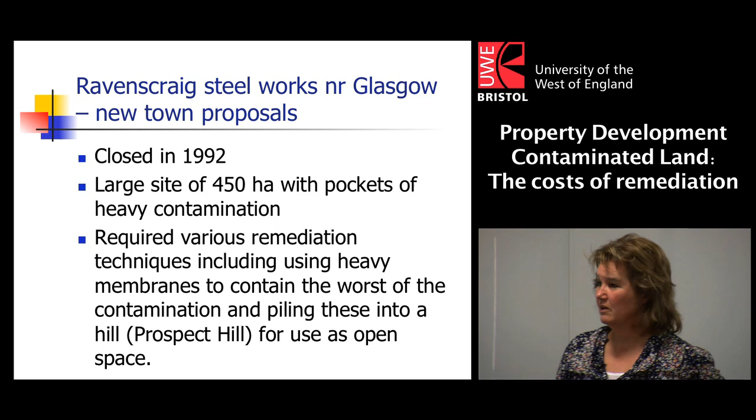an open space. So if we look at the master plan for this new town which they're proposing at Ravenscraig, you can see all sorts of different uses there: schools, housing, town centre, college and so on. You can guess that this is Prospect Hill here, and that is made up of several thousand large plastic bags, probably about the quarter of the size of this room, piled up with the most serious contaminants within it. And protected as open space. That will not be built on.

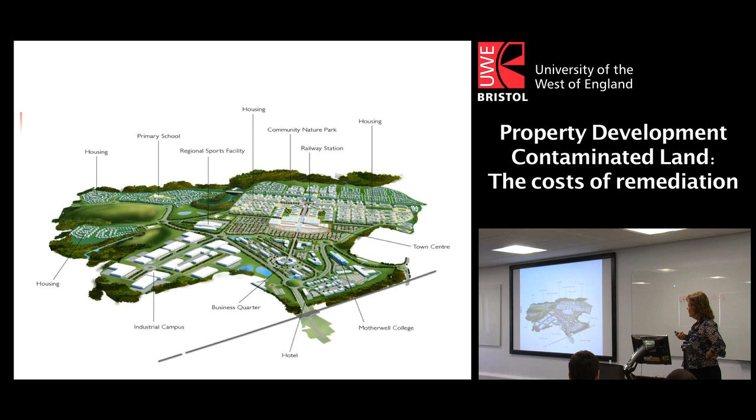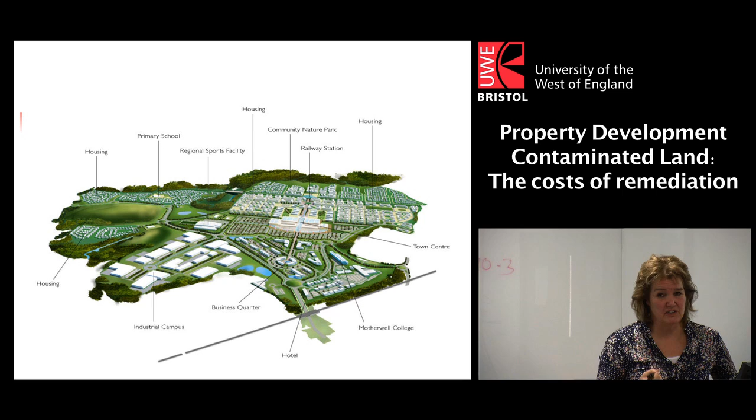That's become a landscape feature on the site, and was seen as a less expensive way of cleaning up that land rather than dig and dump or any other of those remediation techniques we looked at. So that's quite an innovative idea, isn't it? Keep it on site, bag it up, seal the bags so that they can't leak into the surrounding watercourses or the surrounding soil, and use it as a landscape feature. So you don't have the risk of building on top of it as you did at Bryn Mawr.

Cost of that was round about £24 million to remediate that site. Again, heavy subsidy, because this is an area now of severe high unemployment and social deprivation. They've been trying to regenerate this site since the mid-90s, and I think they've now started on some of these housing areas over here as the first phase of it. And of course, not the best timing for a major regeneration project in what's essentially a fairly low demand area. But that's an interesting example of a rather innovative approach to remediation.

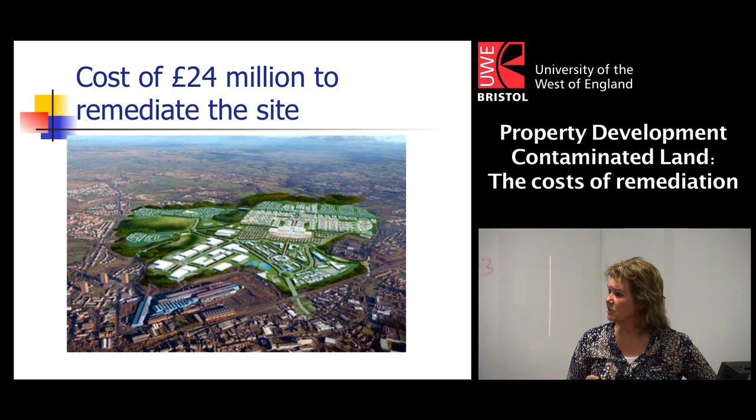And the third example I want to show you is of Wimpey Homes in North Cardiff, who wisely or unwisely, you might have your own views on this, swapped a piece of land with another house builder in Cardiff, and it was a proposal for 32 new houses, but it was poor ground. It was not a very good subsoil, and the necessity was to create sufficient foundations for these houses that they had to pile the foundations to an average depth of 18 metres. Now, that's pretty deep piling, isn't it? In fact, that's very deep piling, and it's very expensive to do. But that was the only way they could provide safe foundations for these new homes.

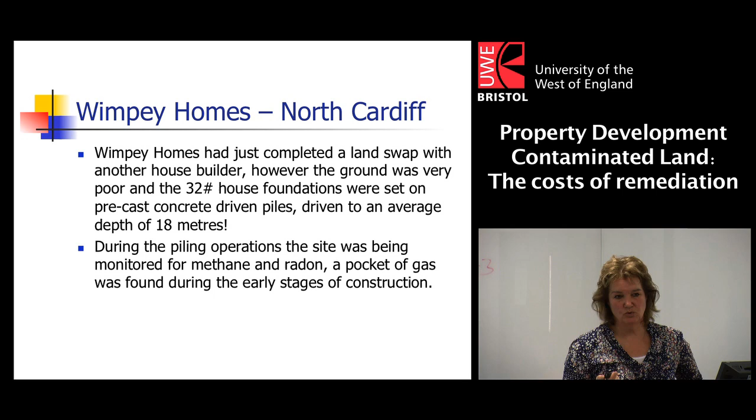During the piling operations, they knew there was potential for contamination on the site, for methane and radon. And so while they were doing these piling operations, the Environment Agency was monitoring whether there were any contaminants or pollutants on the site. And they found a pocket of radon gas during the early stages of the piling. And when that happens, the developer then has to take steps to make sure that those houses are going to be safe to live in.

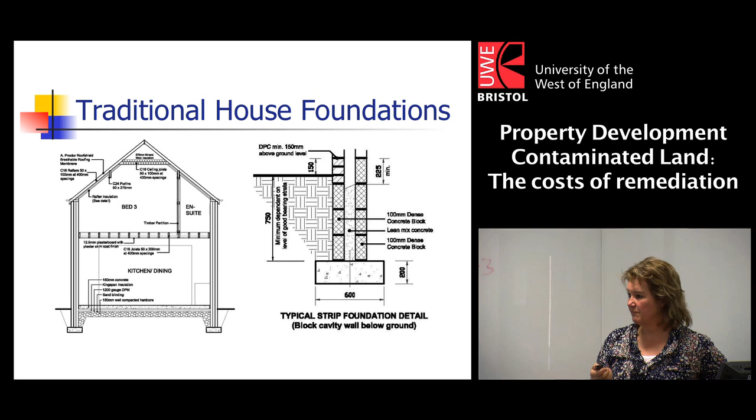So if you go back to your construction lectures in the first year, you will recall that those sorts of foundations might be very typical traditional house foundations, yes? That's what you might expect to see. And there's a typical strip foundation with a block cavity wall below the ground. And most houses, all these new houses being built out here by Redrow and the other housing developers, will have those kinds of foundations, which are fairly easy to construct. They're not very expensive, and would very typically form safe foundations for the design life of those houses.

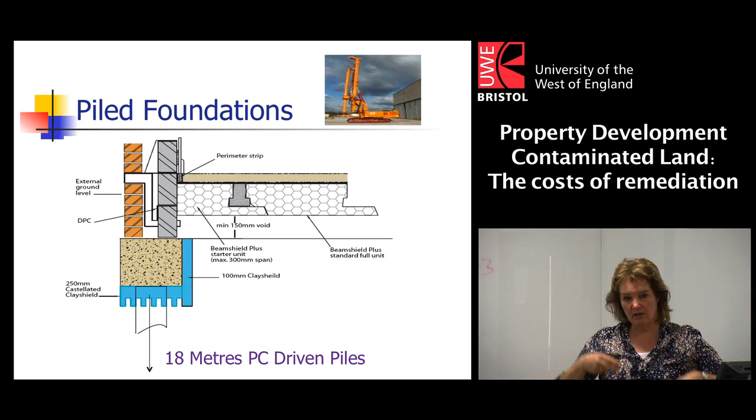What they had to do on this Wimpey site was to use a pile driver. You can see the pile driver there at the top. And they had to provide these 18-metre driven piles through this filled land. And if you look at the scale of that, it's pretty significant, isn't it, in terms of the depth, the extra cost, and the significance of those piles. So that was the first extra cost as a result of the poor ground conditions. The second big extra cost was because of this potential gas that they found in pockets underneath one of these houses when they were piling the new houses.

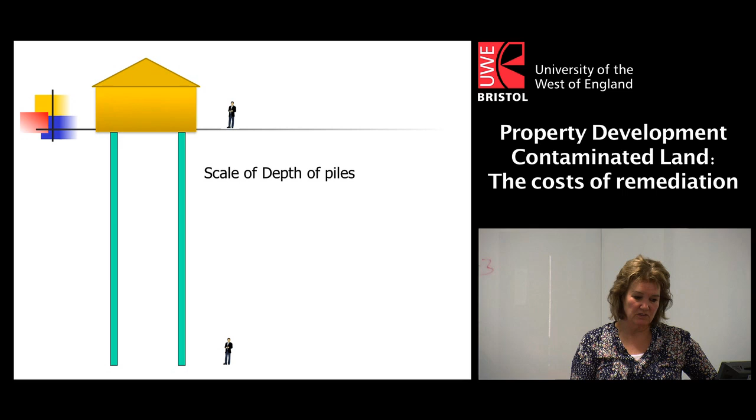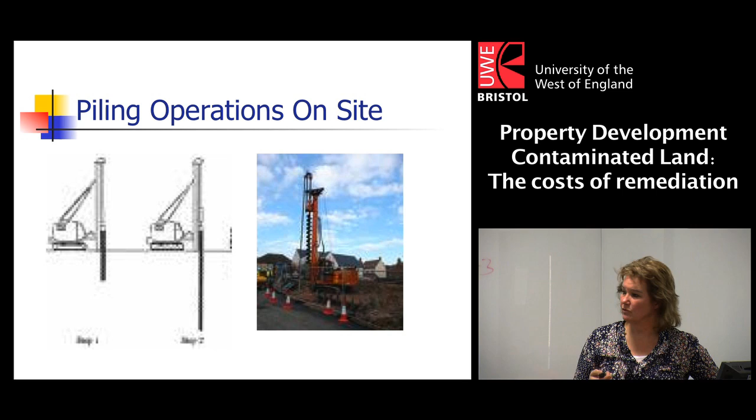So there we have the pile drivers. I'm sorry, that's not a very clear image, but driving those piles into the ground, and there's an illustration of the sort of equipment and machinery that they were using to do that. So as a result of the gas, the company then had to take action. They couldn't ignore the fact that this gas had been found. So not only were the foundations slightly unusual, but they had to change the design of the slabs to beam and block as suspended slabs, and they had to put telescopic vents into them to help with ventilation, to avoid any build-up of gases in the foundations of the houses.

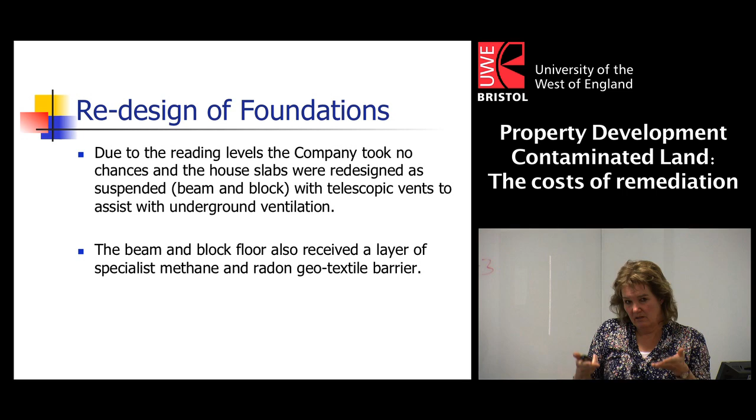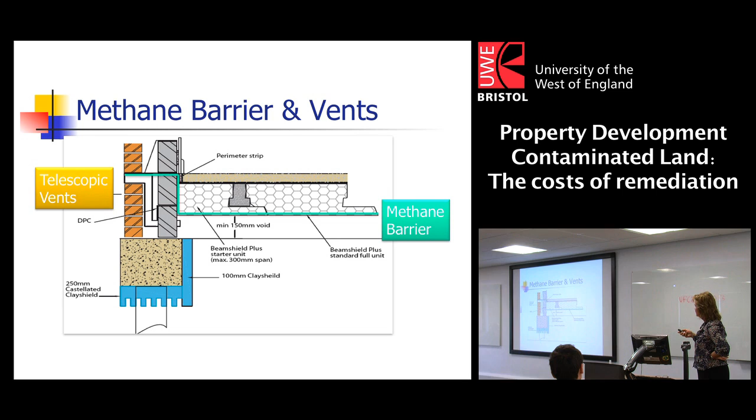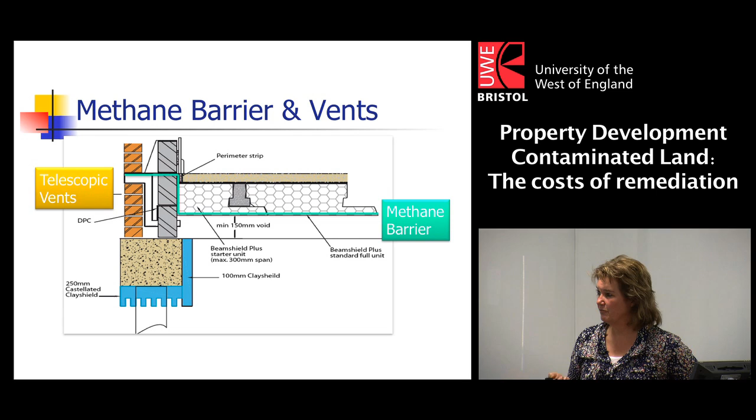Part of that also included a layer of specialist methane and radon geotextile barrier. So a new geotextile barrier was put into those foundations to stop any gas getting inside the buildings. So if you look at how that might have worked, you can see the green line there is the barrier to prevent the gas coming up, and then the ventilation comes in at the side to ventilate that void under the beam and block floor. So quite significant changes to the design of the foundations, extra costs, extra time in construction, extra specialist skills required to make those foundations safe and to prevent any gas coming into those buildings.